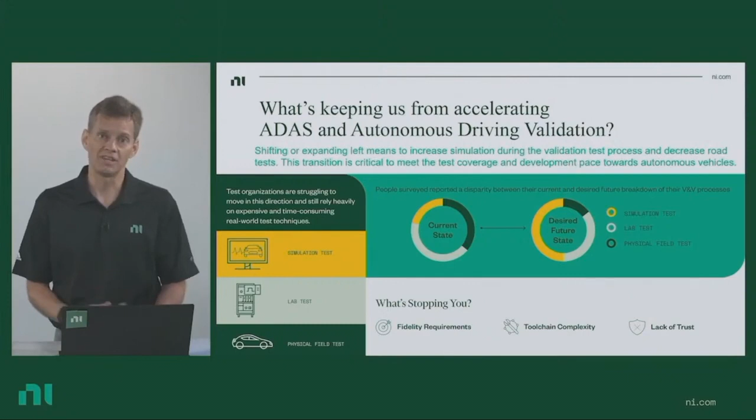The thing that is keeping us from being able to do that is an inherent distrust in simulation. We need to ensure that we believe that the fidelity of the simulation accurately represents the real world so that the tests that we run can reliably be related to real world scenarios. For that to happen, simulation fidelity needs to continue to improve. And here we're going to talk about how we've made steps to improve that fidelity and how the NI and Ansys tools are being used together to make simulation more reliable and help us get more miles for less time.

So to make all of that happen, in order for us to truly trust simulation, first of all, we need high fidelity across the board. We need high fidelity environments, we need high fidelity sensors to interact with those environments, and we need reliable vehicle dynamics to make sure that the scenarios that we're covering can really be qualified and tested in accordance with a real world scenario.

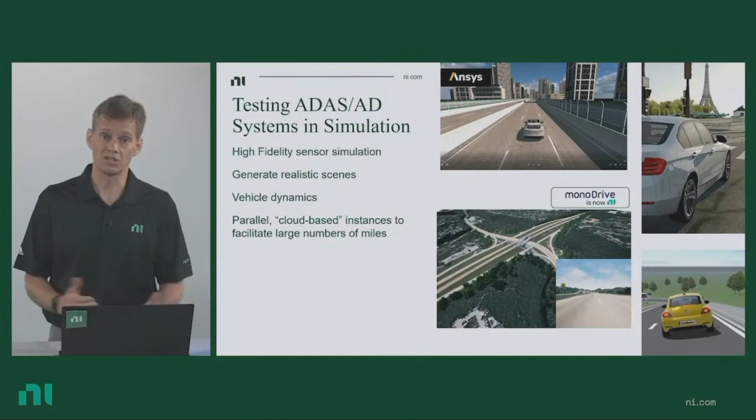And then we need to take all of those scenarios and run them in massive parallel environments, whether that be a cloud-based infrastructure or an on-prem IT infrastructure. We need to run everything in parallel so we can cover as many miles in as short a time as we possibly can. And to that end, NI has been making significant investments to improve our simulation capability.

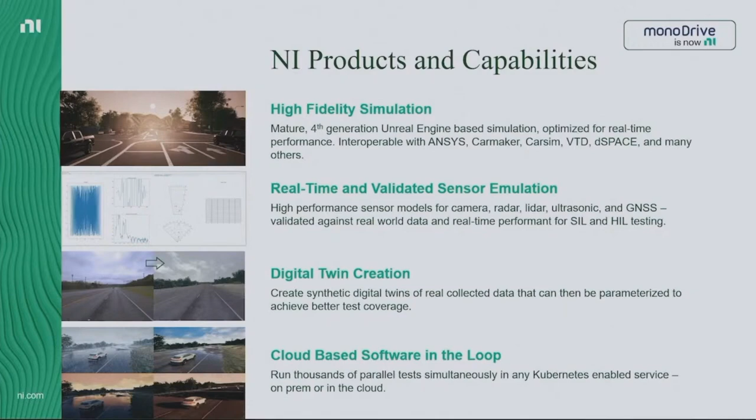So we recently acquired Monodrive to include high-fidelity environmental simulation into our platform for real-time hardware-in-the-loop testing. Monodrive is an Unreal-based engine that's real-time capable, very well complements hardware-in-the-loop test systems, incorporates sensor simulation, and we can also take real data that we've recorded in test tracks and test runs in our fleet.

We can convert that into simulation data, which can then be used to run simulation and to create permutations of specific scenarios for greater test coverage. And then obviously all of that can be deployed on a cloud infrastructure for massive parallel scaling. So now I'm going to hand it over to Kishor to tell us a little bit more about Ansys and the NI partnership.

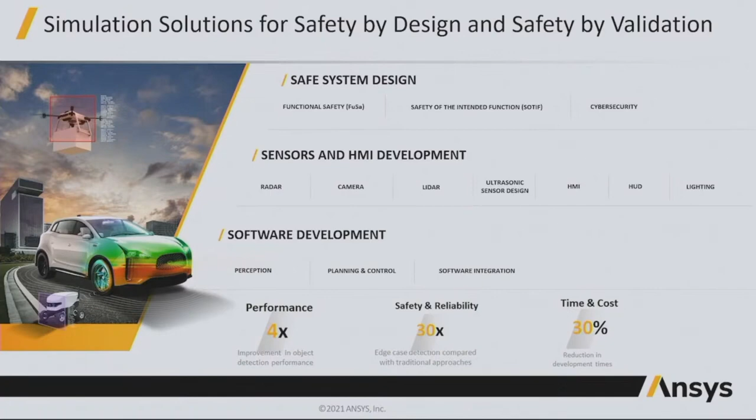But then looking at the safety by validation, which is really the focus of what we're talking about today, using that sensor simulation to create high-fidelity physics-based sensor models that can feed into open and closed-loop SIL and HIL validation systems. And this really allows us to scale, allows us to reduce the time to market and the cost, and improve the overall safety of these autonomous systems and ADAS features.

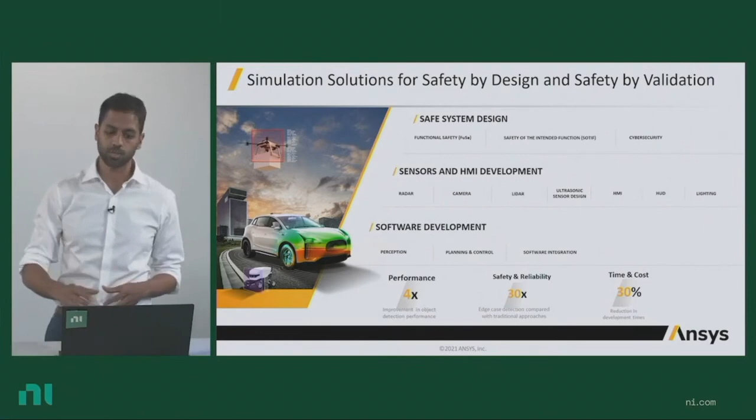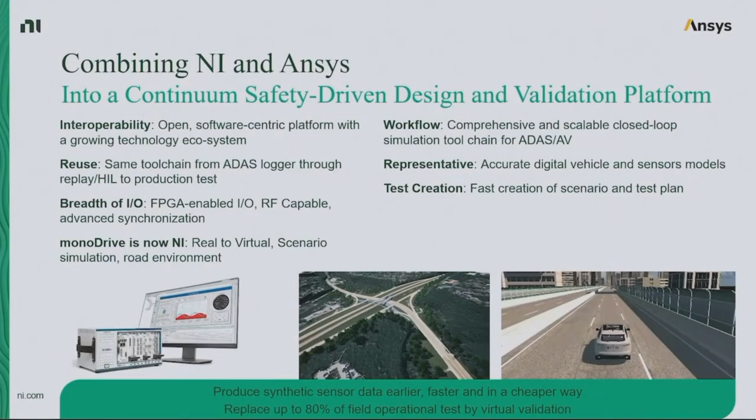So combining NI and Ansys together, really the goal is to combine this into a continuum safety-driven design and validation platform. We rely on a few things: an open ecosystem, software-centric simulation platform, reusing the same tool chains throughout the entire process, from open-loop replay all the way through to closed-loop SIL and HIL, and relying on high-fidelity physics-based sensor modeling, physics-based environment modeling to really produce synthetic data earlier in the process and ultimately reducing the amount of field testing that's required. So let's look at one concrete example.

Here we're looking at testing of intelligent headlamp systems. So this is traditionally done through physical testing, night drives, which has a number of issues. One is that these environments are highly unreproducible. Two is that it's very costly and time-consuming to do these tests physically. And also, frankly, for the drivers, there's safety concerns in testing these features at night.

So we want to push this more to the left. We want to leverage simulation, in particular HIL testing, to reduce the amount of physical testing that needs to take place. This has a number of challenges, especially for nighttime. We really need to make sure that the simulation that's being produced, the synthetic data that we're producing, is representing the artifacts and the phenomenon that the real camera system is experiencing in the real world.

And in particular for nighttime testing, one of the things that's critical is the illumination. And you can see that on the screen here, the very bright headlamp spot compared to the dark contrast around it. This is primarily what these perception systems rely on at night for performing detections. So we need to make sure that we're accurately simulating the illumination from these headlamp systems, as well as how that illumination is processed, the conversion from photons all the way through to electrons, and make sure that we're maintaining all of the artifacts that can be introduced through that entire process.

And of course, from a light interaction perspective, we need to make sure the materials within the environment are accurate so that we're getting proper reflections off of the road or off different signs coming back into the camera system. So all of this really requires high-fidelity sensor modeling, physics-based sensor modeling, in order to replicate what's happening in the real world so that we can use simulation and HIL testing to push everything to the left.

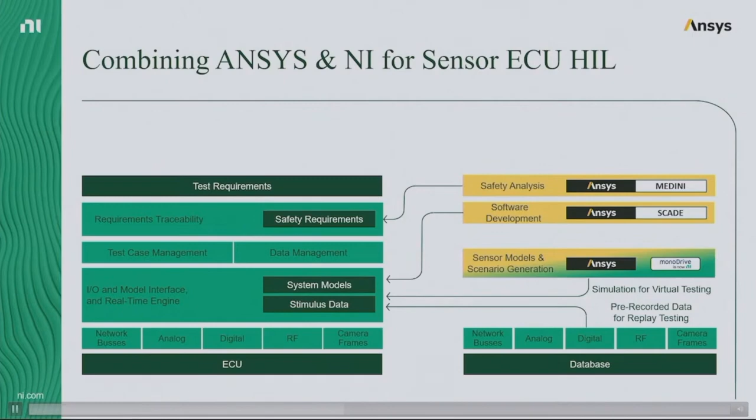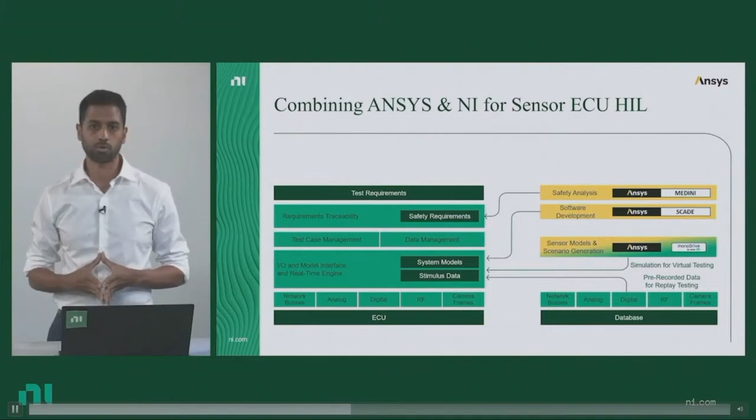And finally, looking at the high-fidelity physics-based sensor models from the Ansys software combined with the scenario generation, environment generation of the monodrive tools to allow for virtual testing through simulation. So now I'll pass it back to Nick to walk us through what the HIL system looks like.

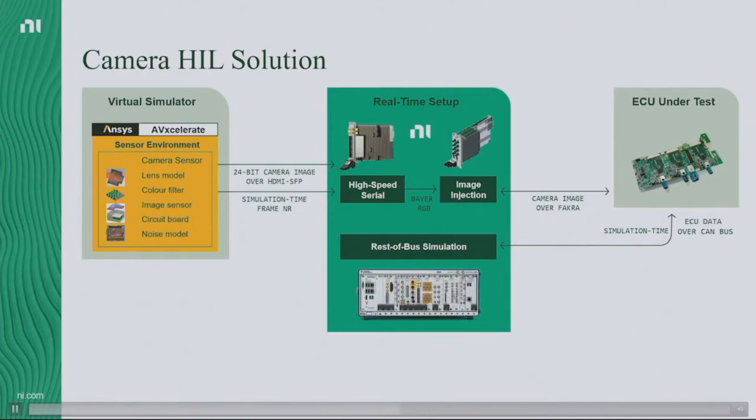And what this allows us to do is it allows us to encode and decode the video signals on the input and also add errors into the stream to actually exercise and thoroughly test that ECU perception algorithm. So what does that actually look like in practice?

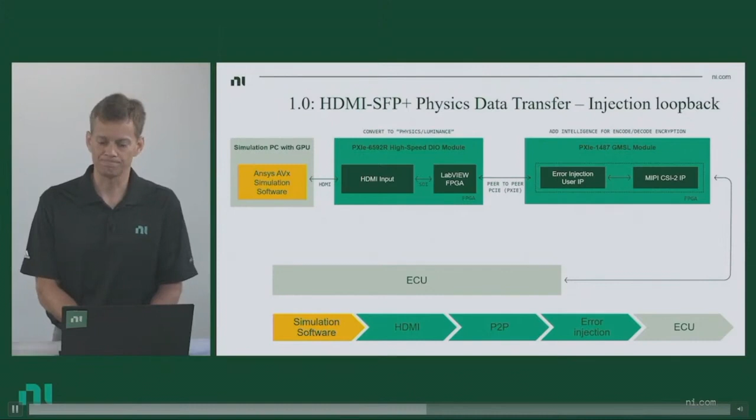We take the Ansys simulation software, we put that out of the GPU through the HDMI port into the NI HSDIO or high-speed digital board where we do the decoding on it, pass that across the backplane into our camera injection module that is also equipped with an FPGA, connect that through FPD link or GMSL to the ECU to run our tests. All right, so that's a high-level block diagram of what a system might look like. Let's take a look at our demo for this particular application.

So what we have here is a high-performance computer running a GPU running the Ansys simulation software. Out of the back of this, we've got an HDMI port that's being connected to our PXI system to our HDMI input port. Let's take a quick look at what's inside the PXI.

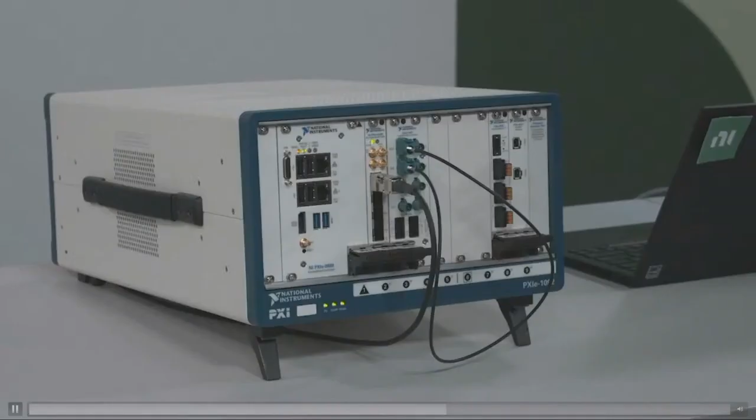So on the PXI system, we've got our embedded controller, which is running a real-time operating system to handle all of the I/O. We've got our HDMI input, which gets handled into the FPGA board through an SFP plus connector. That video signal gets connected along the PXI backplane, which runs a high-speed timing and synchronization clock into our FPGA-enabled camera interface module that has interfaces for either GMSL or FPD link.

In this case, what we're doing is a loopback, so that enables us to view both the data that gets put into the RT system from the simulation software, as well as the manipulated data where we've injected some errors and done some video processing to replicate what would actually go into an ECU.

And then the system can also be equipped with peripheral interfaces for embedded networks like CAN, LIN, and FlexRay, as well as standard Ethernet interfaces and Automotive Ethernet interfaces. So this is what the hardware looks like. Let's take a look at the demo.

So now we've got a tile on the left that is what's going on in the input of our HDMI interface. So this is what's coming out of the Ansys simulation software. And on the right, what we have is the output of our camera interface module. So we're getting the data from the simulation software, we're decoding that raw data, and then we're putting that into our error injection module that can also talk to automotive cameras and ECUs. And we're able to visualize both simultaneously.

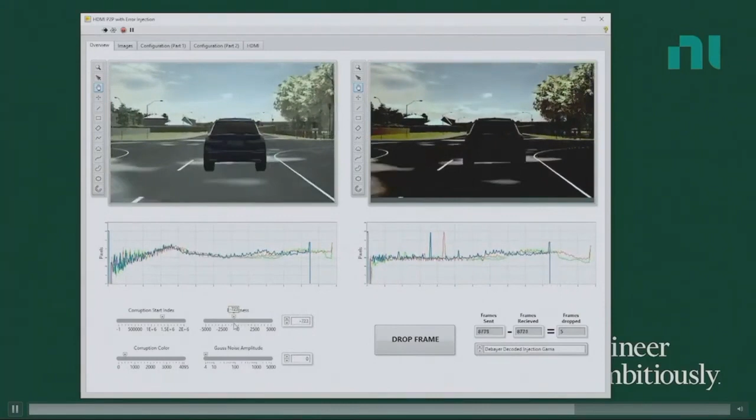All right, so we've manipulated individual pixels. Now we're going to take a look at manipulating the whole image. We're changing the brightness of that image, again, to see how the perception algorithm works in a whiteout condition or in a scenario where the lighting is poor. If we can black it out or white it out, we can see how our perception algorithm responds.

And then the last piece is adding Gaussian noise. So here, again, at what point does our perception algorithm stop detecting objects? We're able to add Gaussian noise here to see when the confidence drops, where we no longer are able to track what's in the video. And these are just some examples of the types of things you can do in a real-time environment, incorporating image manipulation.

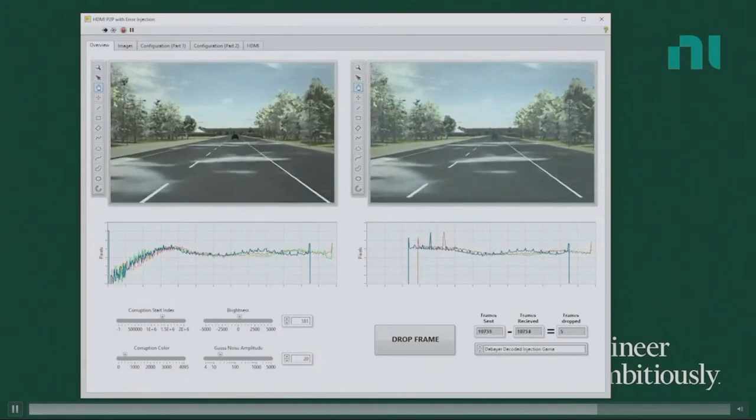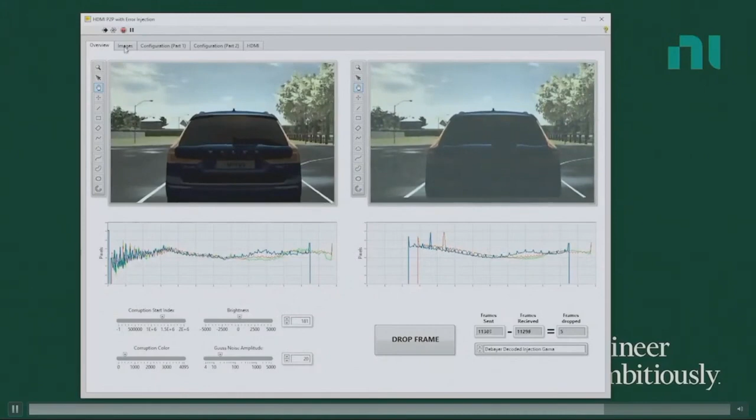And then, while we're doing all of this, we're recording and tracking the histogram, so the data of the images. We're able to track how they're different. So we're very easily able to replicate this in the future. We track all of the different parameters of those images, so that way we can run it in an automated environment. And now we blow up and zoom in on this image, and we can get a whole new series of characteristics. I'm going to have Kishor tell us a bit more about what's going on here.

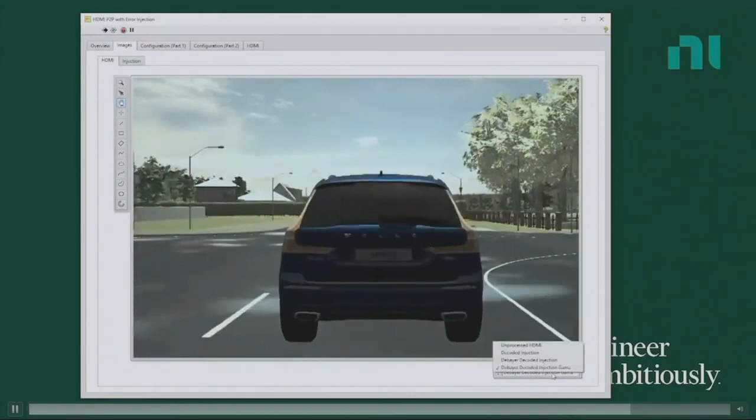Perfect. Thanks, Nick. So what we're looking at here, as Nick mentioned, is the output from the Ansys simulation. But if we take a step back, what's really happening is we're simulating the world and the light in the world. And all that light, which is a full spectral simulation, so we have all the wavelengths of the light, is being processed through the camera system. When that light goes through the optics and into the imager, it becomes a digital signal. So we've gone through the color filter array and created a digital signal. And really what we're seeing is that demosaic signal, so the decoded signal.

So we can change that decoding structure from before looking at more of an RGB decoding, here looking at more of a black and white decoding. So this is typical of an RCCC color filter, one of the standard color filters that is used in the automotive industry, whereas the previous one is more of an RGGB color filter. So we can really look at the decoding of that digital signal and what that gives us.

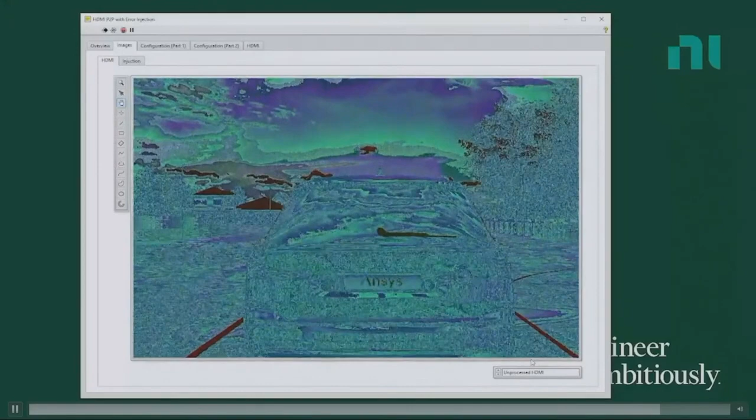And here, now what we can also do is look at the raw signal. So the raw digital value, the voltage essentially that's being transmitted from the simulation before any post-processing takes place, is also available, and that's what we're visualizing on the screen here. And this is most commonly used when we actually need that raw digital signal to be sent to the ECU. Many ECUs rely on raw data to perform their perception algorithm, and they don't want any post-processing to take place. So we have access to that raw data, and we don't need to decode it. We can simply pass that raw data into the ECU. Back to you, Nick. All right, thanks, Kishor.

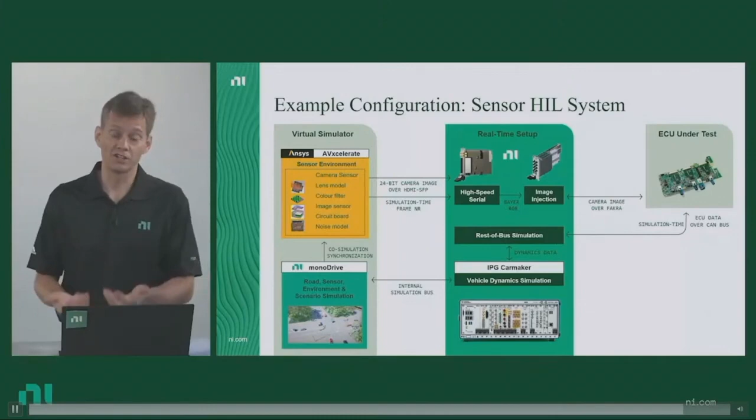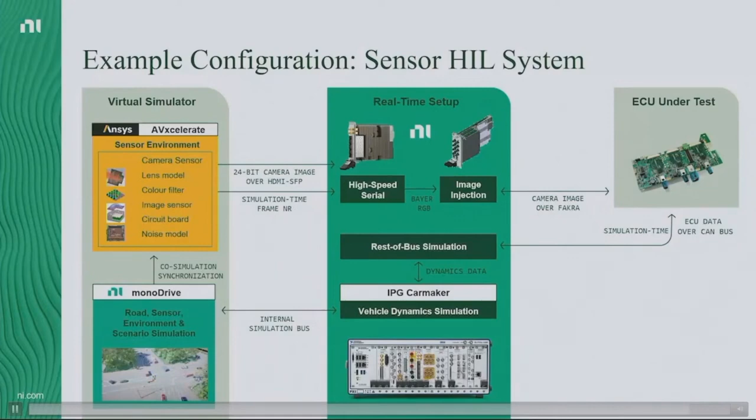So we've seen a demo, we've seen how the physical system is set up, and we've taken a look at a use case where we're testing a camera ECU. This can certainly be expanded to incorporate more robust environmental scenarios and variables, as well as vehicle dynamics, to test both additional sensors as well as sensor fusion algorithms. So we're really just building on top of what we've shown you here today for more complex systems and hardware-in-the-loop testing of systems of systems. And the HIL testing infrastructure is a key part of the ADAS and AD software V&V chain.

If you've seen some of the other webinars that we've done, we've done webinars about the data recording systems where we can record a lot of data and acquire that and inject it into an IT infrastructure where we can tag it and manipulate it and add it. And we can also convert that into simulation for running closed loop, hardware in the loop, model in the loop, software in the loop, and connect that to an ECU. So between NI and Ansys, we're working on an end-to-end unified tool chain for testing AV compute stacks across the board.